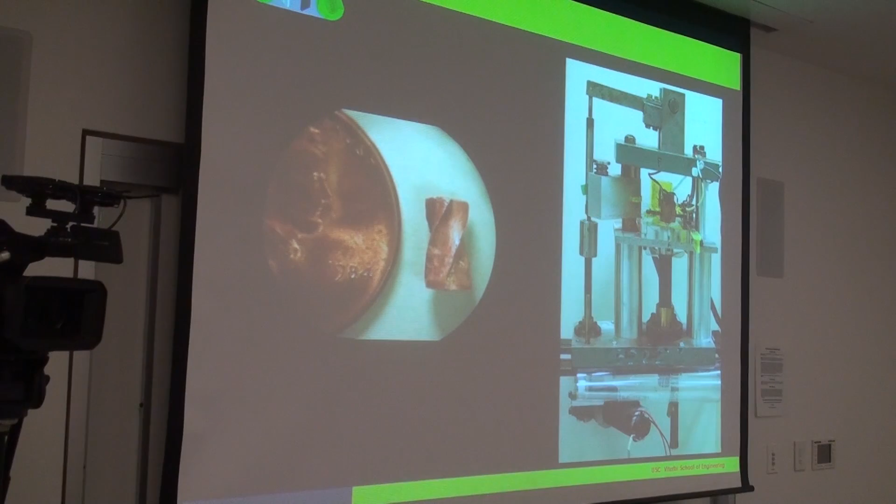So I thought a lot, and I concluded that there's really no way other than increasing the layer thickness in order to increase the speed. But if you increase the layer thickness, you lose surface definition, and you get, for example, for slant surfaces, this staircasing effect, right?

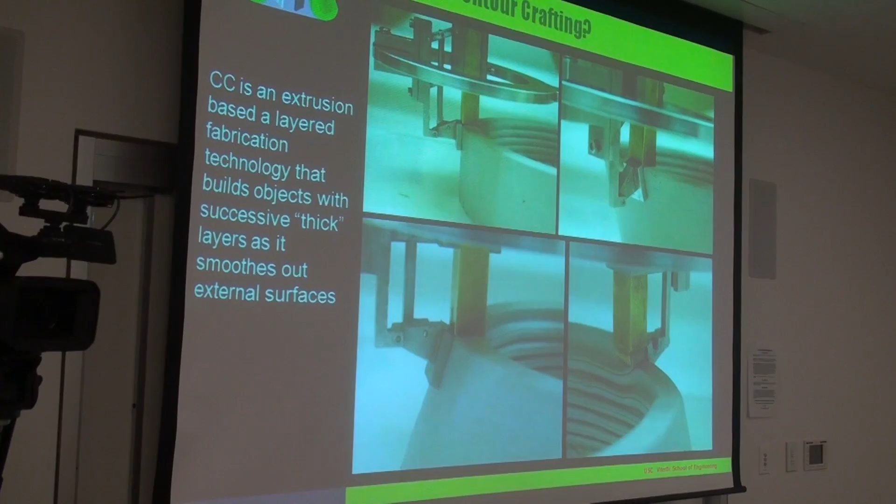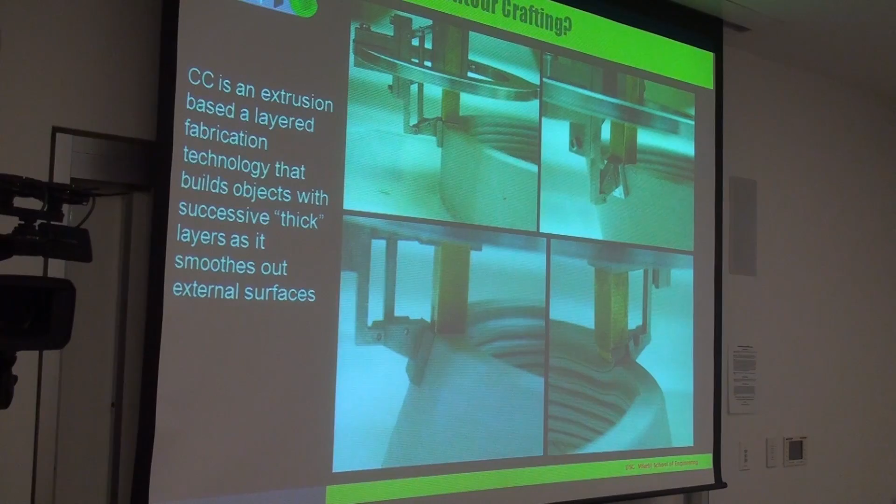So the concept came to me when I was filling a crack after the earthquake, the Northridge earthquake in Los Angeles. We got big cracks in the living room and other places. So I went out and bought some plaster and a putty knife, and as I was filling that, I was in Santa Barbara at that time. Yes, so as I was filling these cracks, it occurred to me that the simple tool has great capability in producing wonderful surfaces.

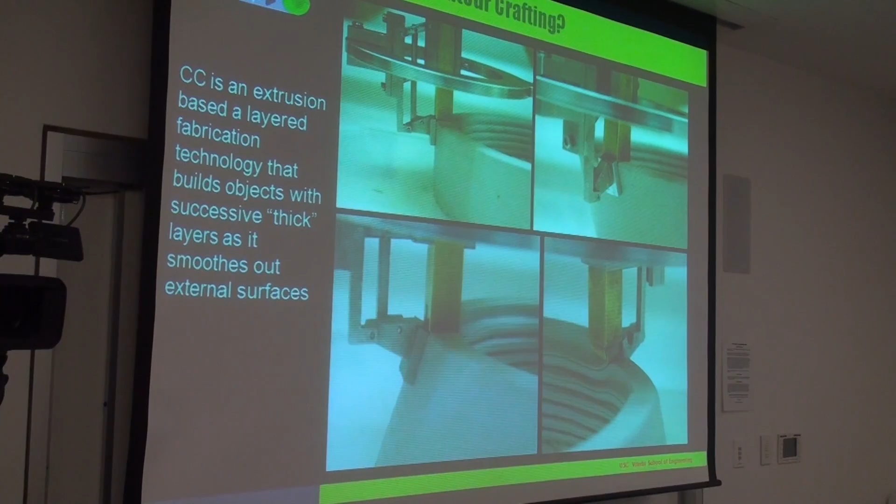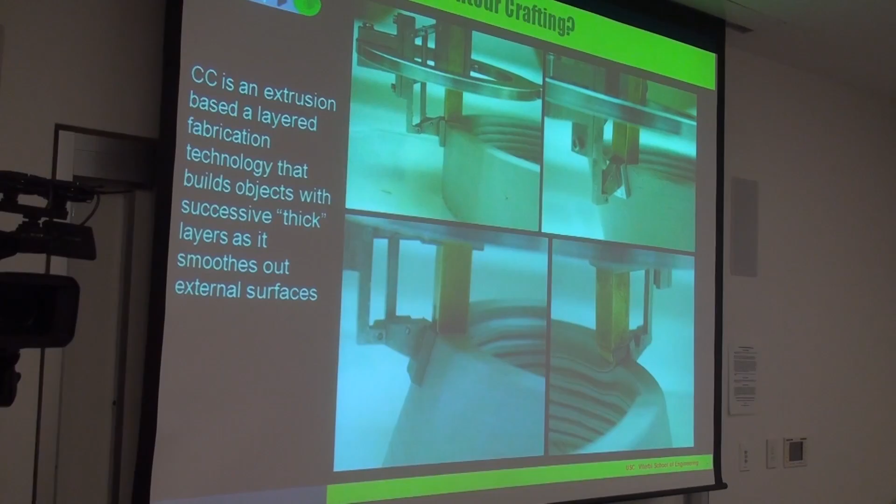So then it occurred to me that if I automatically feed this trowel with material, paste material, and move it in 3D space using a robot, then I should be able to use very thick layers and create very smooth surfaces. Well, that's what the artisans do, don't they, actually? Right, basically, exactly, right.

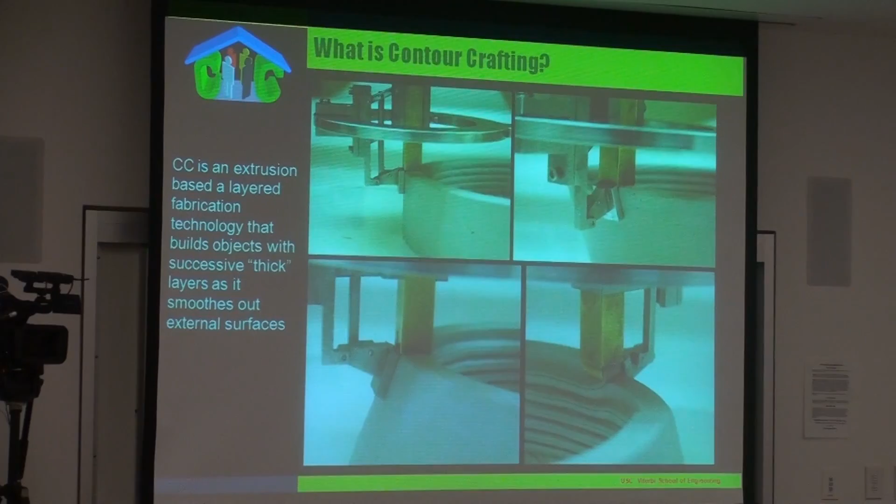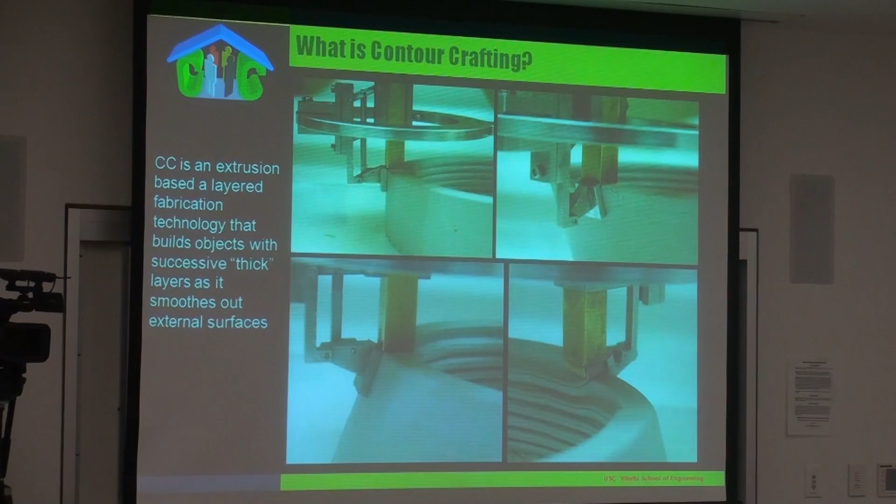So these are some of the early trials, as you see. That layer there is 6 millimeters. Compare that to typical 3D printing that has got a layer thickness of under 1 millimeter, usually 0.25 to 0.1 millimeter. And the surface quality here is better than even those that have got sub-millimeter layer height.

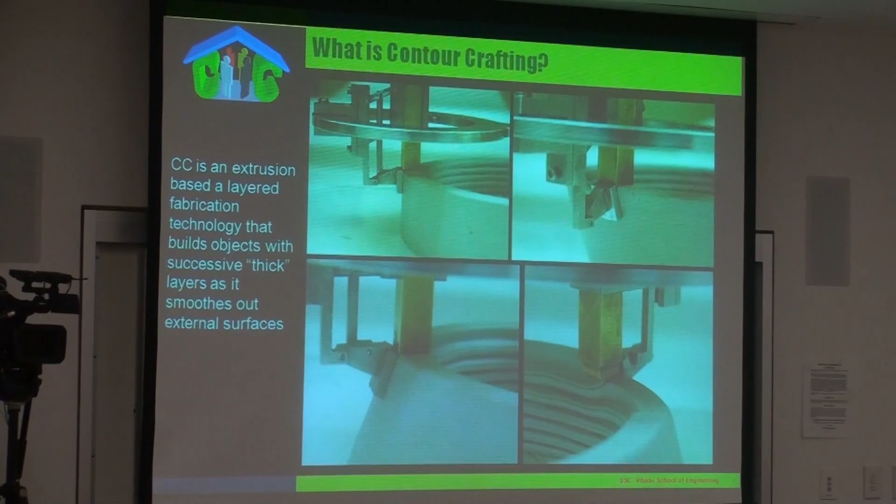What is the nozzle diameter? In this case, the size of every one of those, the size of this has got a square orifice, it's about 8 millimeters. Right.

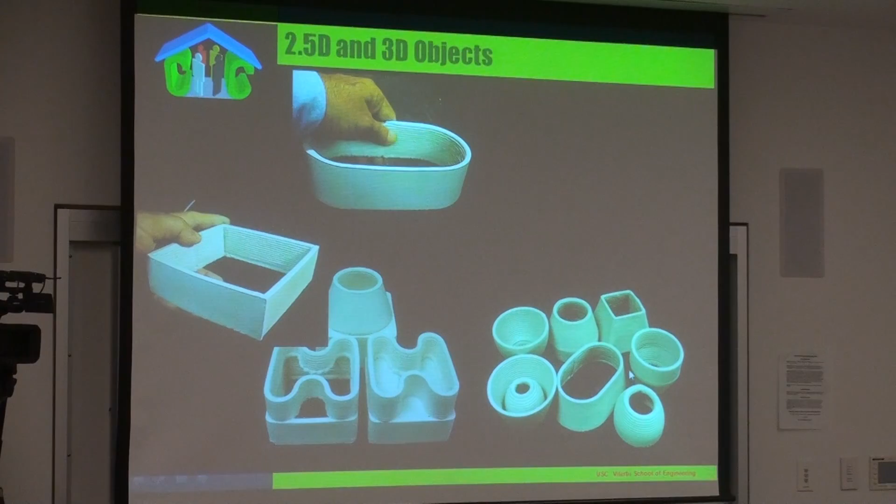So these are some of the ceramic objects that I produced. Then even sharp corners are possible, as you see, with certain algorithms that we use. The overhangs are possible, and so on. So imagine that this could now be thought about as a roof of a house, for instance, or that.

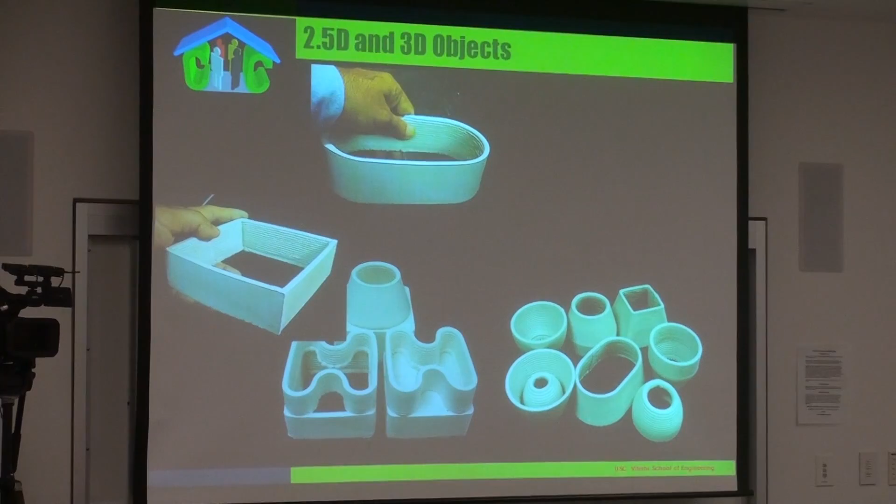So when I looked at these objects, it occurred to me that the potential for this technology really does exist for building very large objects, because the speed was acceptable now.

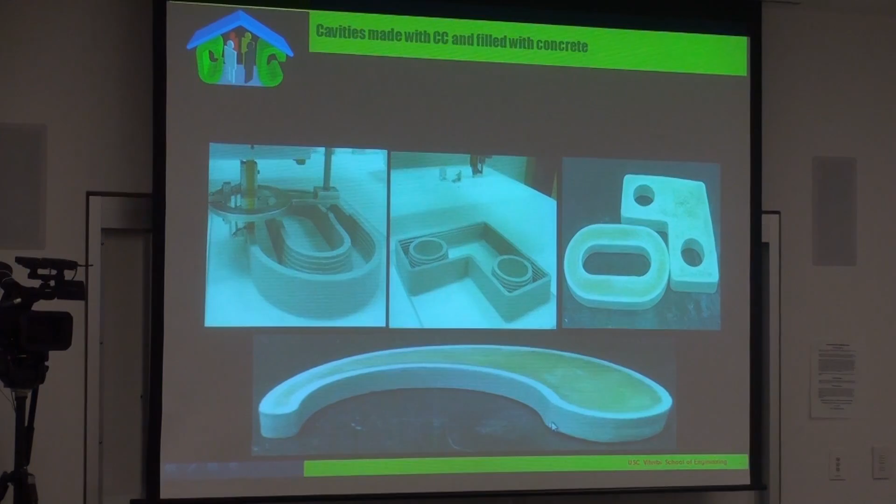So then I moved into creating hybrid objects. For example, this is plaster here, and inside of it is cementitious material, harder material, structural material, and this is soft plaster material. So you get a beautiful outside, but the structural inside.

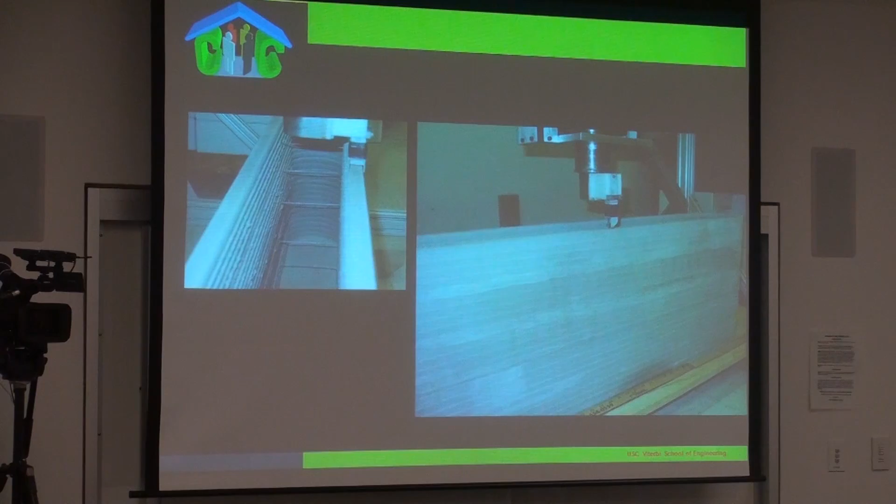So then I embarked upon building concrete structures. And well, when I went to our civil engineering professors, they really discouraged me by saying, hey, you don't know concrete. You cannot make concrete stand on its own like that. Concrete is made to flow and have a lot of slump because it has to be molded.

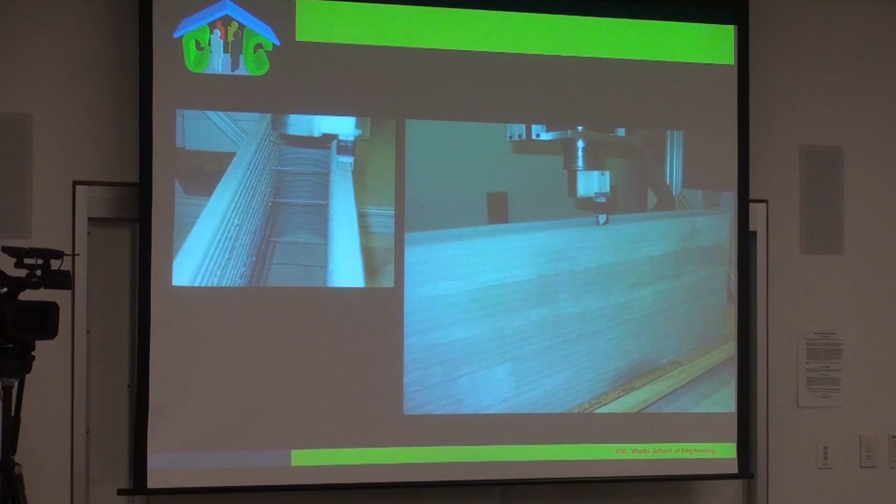So the mindset was the status quo, right? I had the advantage of being naive, you know. I just didn't believe them, right? Because I was not used to that status quo. So I said, well, we'll try concrete. If it doesn't work, you know, the idea is good enough for somebody to develop the right material for it. But we kept at it, and eventually we managed to extrude concrete, the kind that can stand on its own, hold its shape.

So the challenges were several. One is, of course, the low slump and keeping the shape, but the other one is just extrusion of highly abrasive fluid. You know, just try to put this much concrete inside a tube that is this long, 1 inch, 1.5 inch, whatever in diameter, and try to push it in with your thumb. You'll notice that it gets stuck, it won't go forward.

Because these granular particles create a bridge. They press against the walls of the conduit. The more you press, the harder it gets for them to move forward.

This was the big challenge. When that occurs, all the juices go through under the pressure of the pump, but all the sand and gravel stays behind, creating a rock-hard clog that you have to use a hammer and chisel to get out. We struggled with that kind of problem for about a year and a half. What you see here is the result after we overcame those problems—it's a two-stage process that fills the mold. Then we advanced to housing applications.

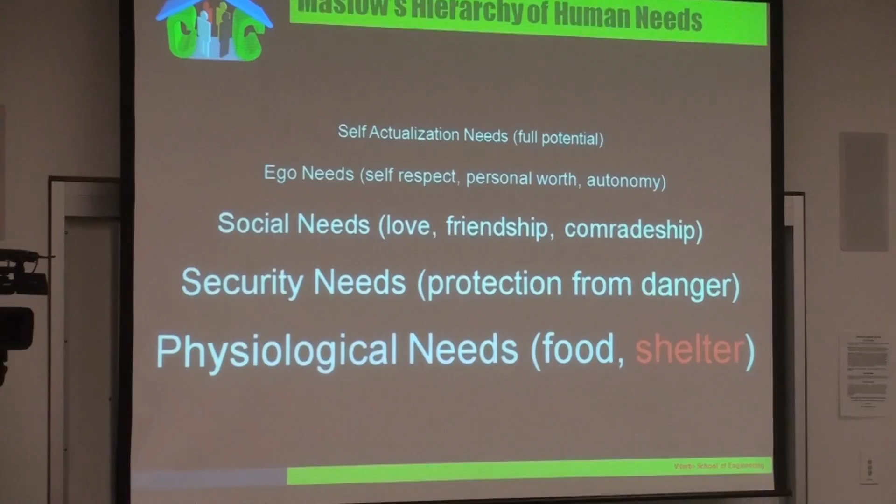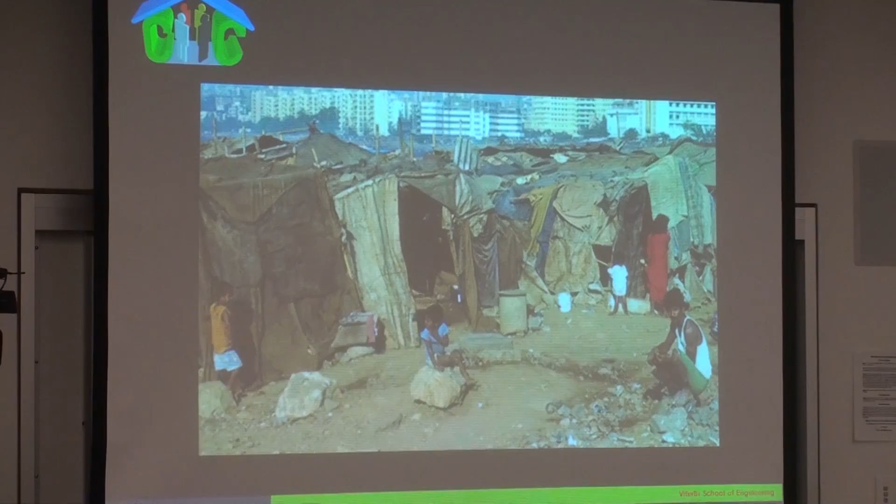You've heard about Maslow's pyramid of human needs, at the base of which are the two essentials: food and shelter. Unfortunately, at the dawn of the 21st century, this is the condition of shelter for more than a billion people—some statistics say 2 billion people live in such slums. I've visited several places in the world, like shanty towns in southern South Africa and other places in Mexico, and some conditions are even worse than that, believe it or not.

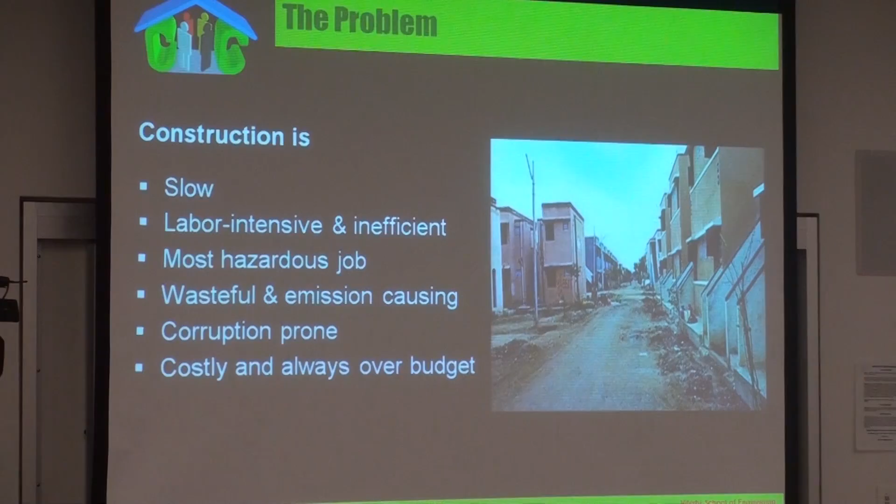And that's one reason automation is cheaper—it doesn't have those problems. Construction is wasteful and emission-causing; wherever there's construction, there's typically a huge dumpster where all the trimmings and wrongly cut materials get dumped. It's also interesting that 40% of all materials worldwide are used in construction, so waste at that rate has a huge impact on the environment. It's also corruption-prone, with many different trades involved, making management difficult, costly, and always over budget.

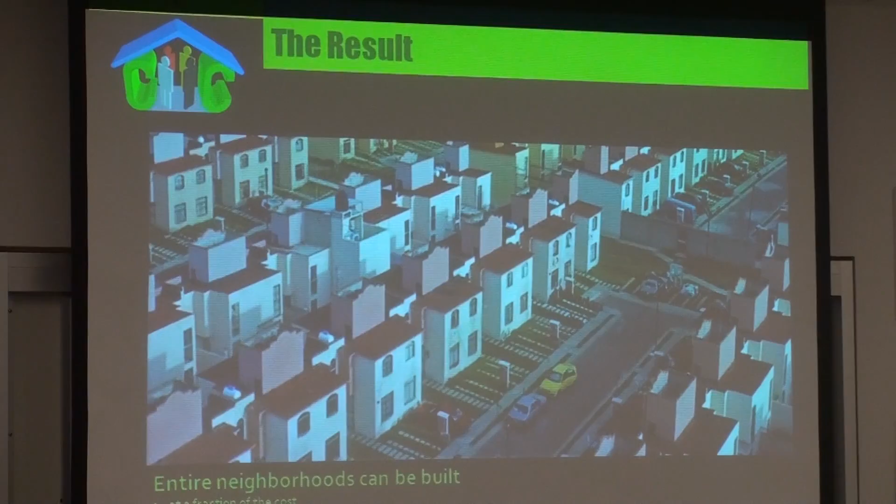So the solution we propose is something that will create dignified, nice neighborhoods instead of those slums, at affordable cost, a fraction of the time, far more safely, and with ultimate architectural appeal—so they won't look cookie-cutter like this, which I just grabbed from the internet. Because the process is computer-driven, there's no learning curve involved, so you don't have to repeat the same designs—every design can be different from the other.

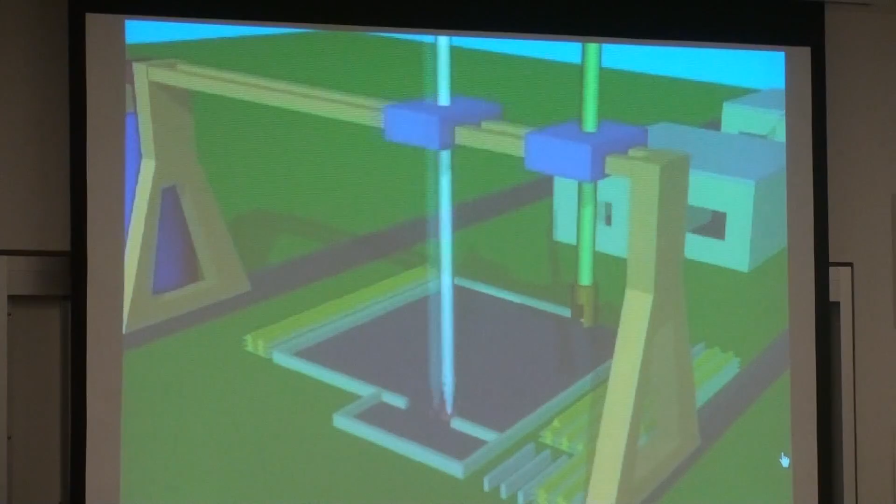This animation, a little jumpy now, shows the basic concept. You set rails in the street, for example, wherever there's a development, and have this machine build one house after another. You bring the architectural design on a flash drive, put it in the machine's controller, bring the material, press a button, and the building will be printed for you.

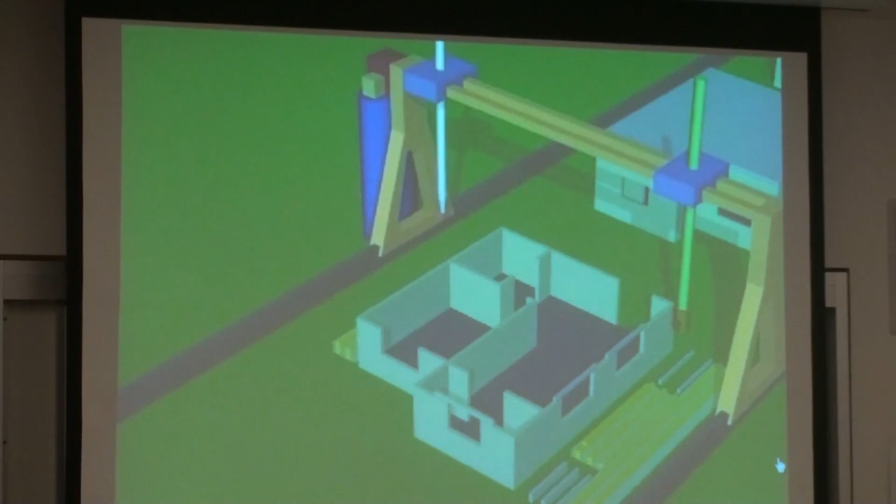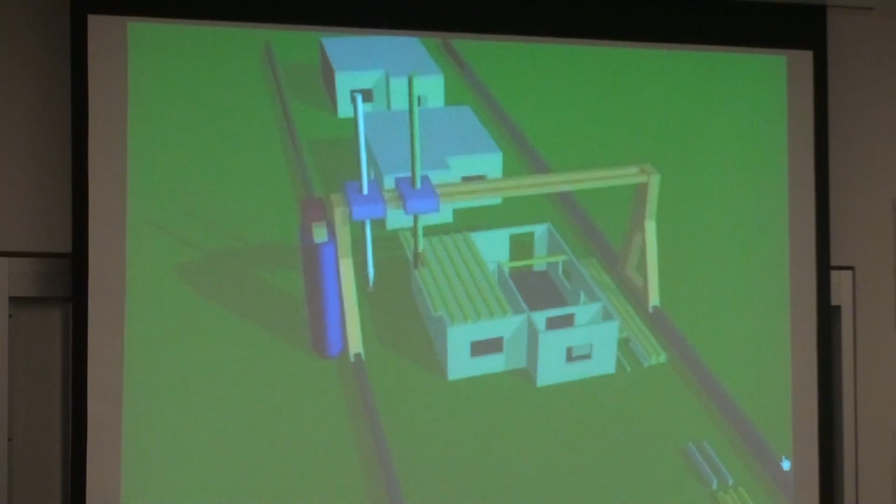Much like any other 3D printing, it doesn't need much attendance. The machine is pretty light—a few people can carry it to the site. It collapses onto a flatbed truck, you take it to the site, and in about 30 minutes you erect it. Everything is laser-guided and self-correcting—the rails don't even have to be well aligned when you put them down. Many operations can be automated, even building the foundation.

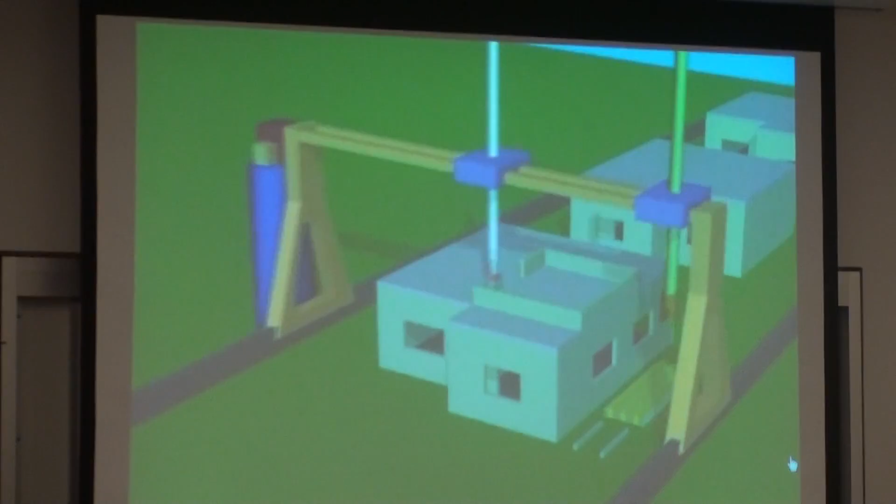So the site itself is the manufacturing line, so to speak. Exactly—you set the rails down, and can the rails disappear afterwards? Yes, you lift them afterwards.

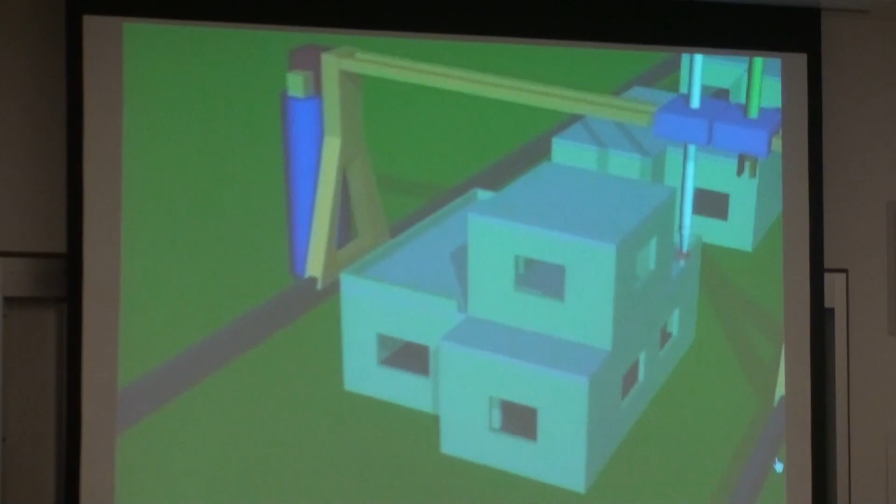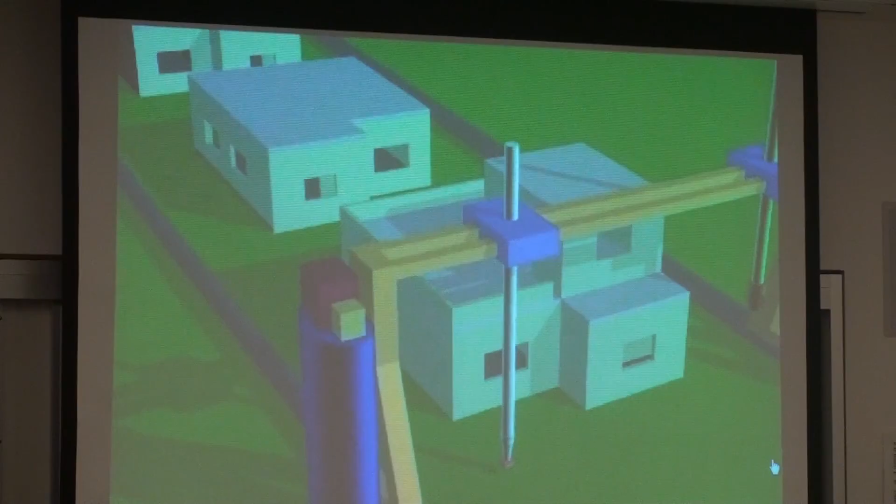What's the consistency of the concrete? It's 10,000 PSI. What's it made of? Concrete—sand, cement, water, the same basic things, but with a very low slump. You can use normal Home Depot concrete; the first wall segment I showed you was made with Home Depot concrete, but we added the right admixtures to make it low slump, to get the rheology right so it can be pumped and flow through without segregation.

The common approach is self-compacting concrete, which is very liquid, but we don't want that because it's high slump. Instead, we have a process where we build the edges and rims with zero slump and the middle with high slump. We bring the same concrete to the nozzle, and at the nozzle we separate it into two channels. To one we add a chemical that increases slump; the other gets a chemical that reduces slump and accelerates curing.

So what's the thickness of the wall? Well, it's variable. Let me show you. A model like this, a house like this, is very easy to build with this technology.

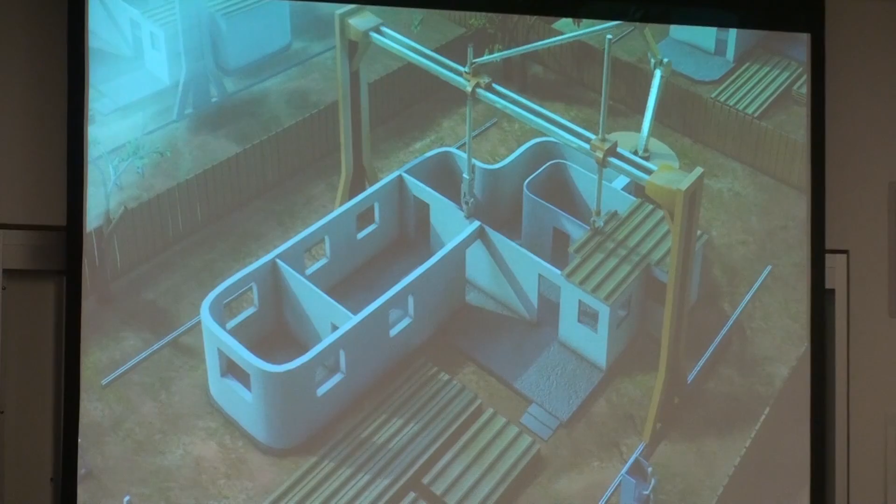And of course, whenever you curve the buildings, you gain strength. Even with the same poor material, like adobe, you can make stronger buildings. I'll show you an example later on.

How do you get over the strength of the concrete for earthquakes? It doesn't seem like it will be very reinforced without rebar or something. Is that right? No, we can put rebar in there. Full length bars? Yeah, you will see in the next animation.

Building with curves is difficult to do, especially if it's doubly curved and so on. It's very expensive, but for technologies that are computer-driven, it really makes no difference. So this is the answer to your questions. This is automated reinforcement, and we have many different approaches.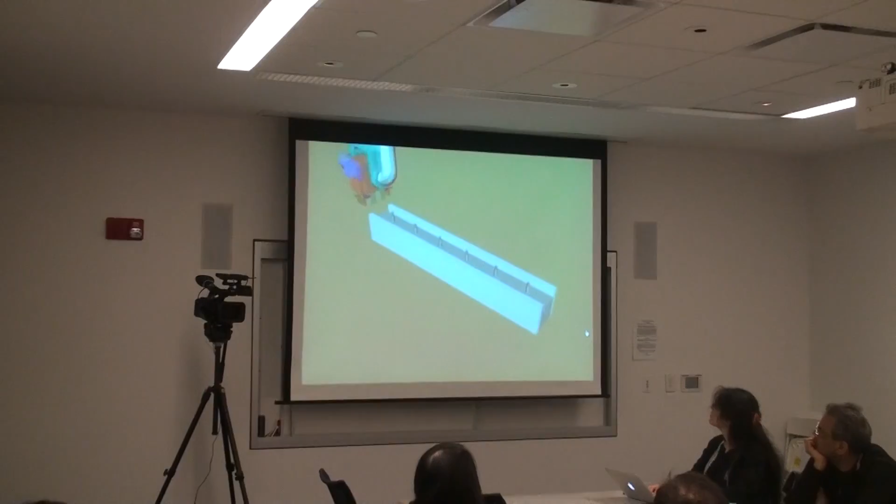This one uses segments of rebar that are assembled onto one another. This is building a two-dimensional mesh of steel automatically. The device you see there is an accessory mounted on the same gantry robot, so it's a very streamlined automation.

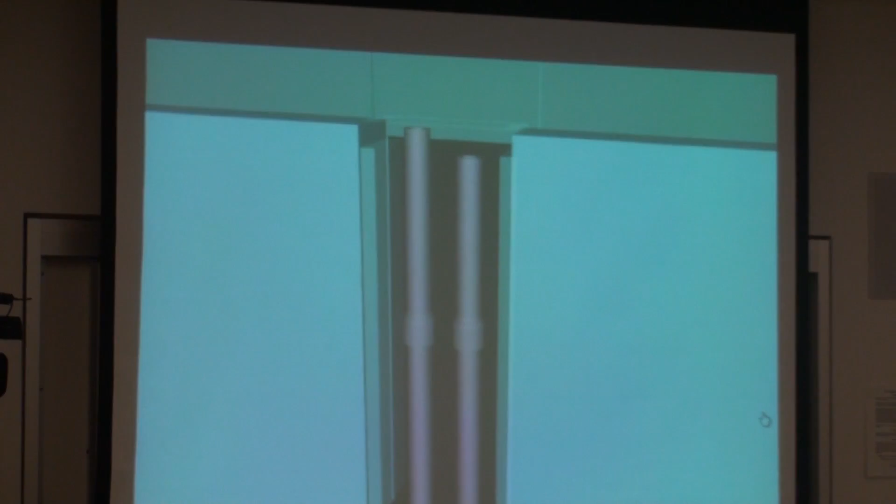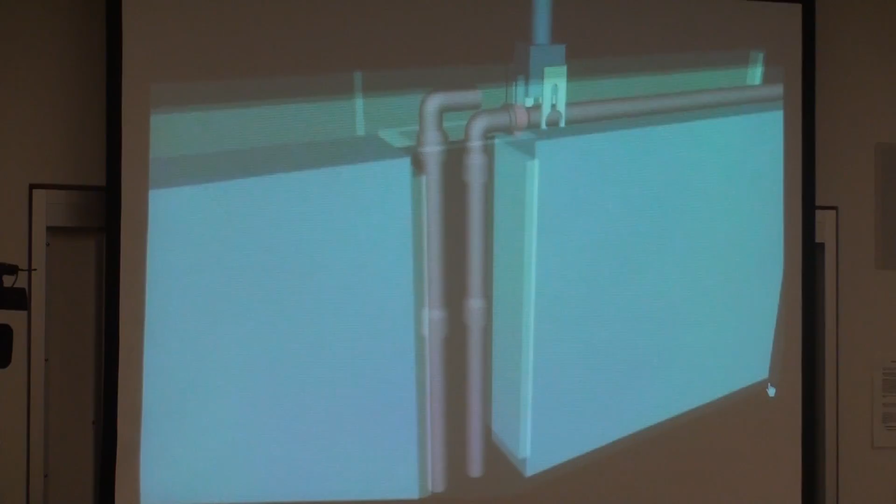For every so many layers, you have segments of, for example, copper pipes that have solder in the inner rim, and electrically they're heated and fused. So you build the whole plumbing network in the building as you build. You can also do the same for electrical network installation.

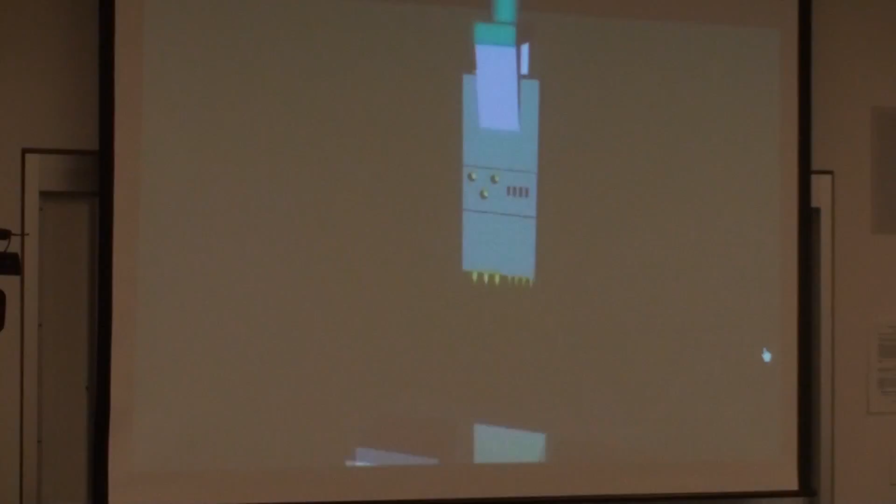These polymeric blocks can have power lines and communication lines in them. All you have to do is, again, for every so many layers, plug them in. It's just like Lego blocks. We have different designs for T-junctions, corners, and all that.

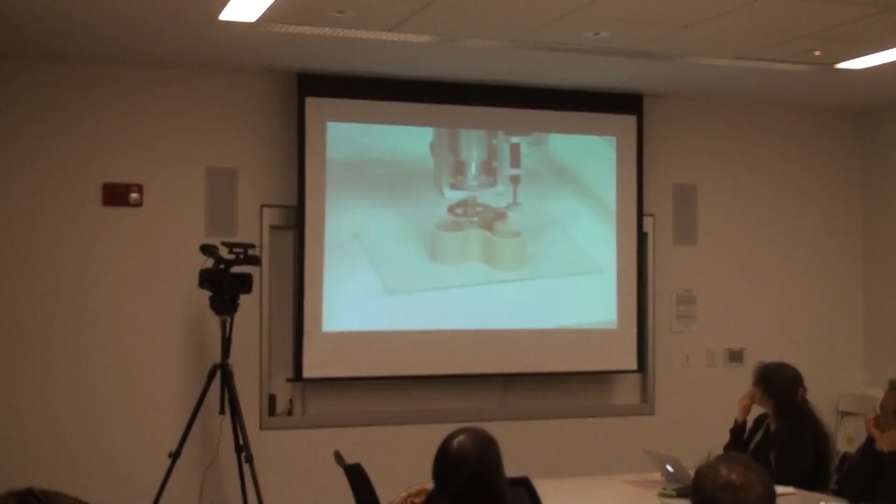This shows the video of the operation at a smaller scale. Some of those ceramic parts you saw, this is the machine that builds it. This is a 2.5D structure. Imagine if you were to build this with a conventional method, you'd have to have a formwork with lumber shaped like that, which is very difficult, if not impossible.

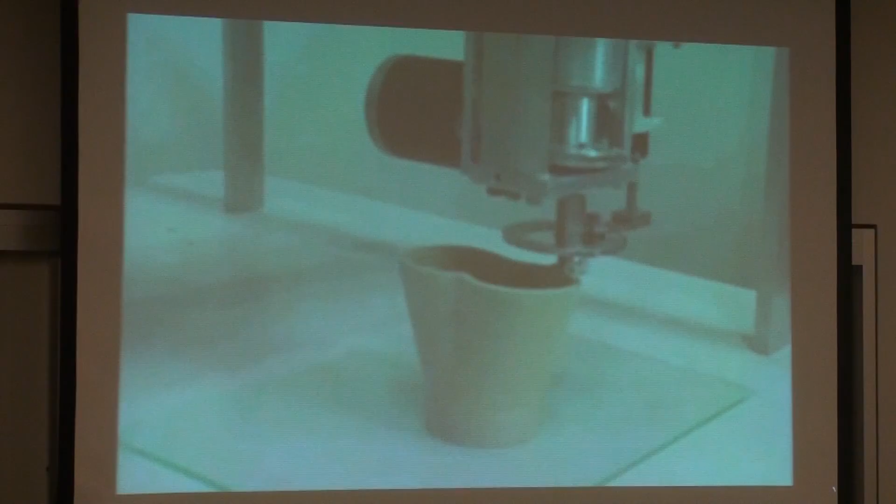That one is true 3D. The trowel is constantly changing its angle as it's moving around. What did you mean by 2.5D? 2.5D means the cross sections are the same as you go along the z-axis. True 3D cross sections keep changing.

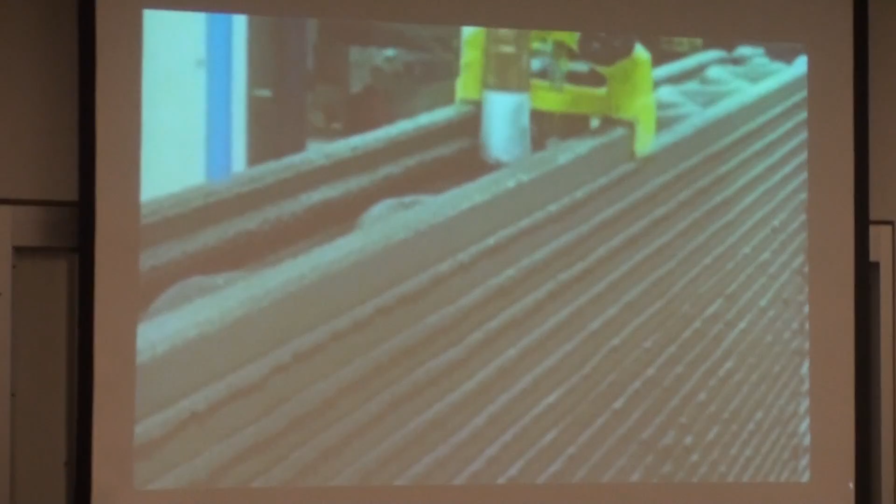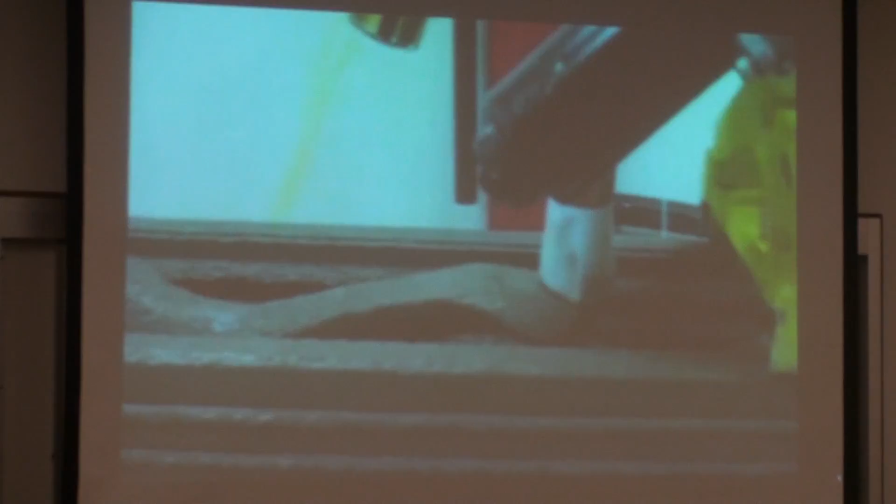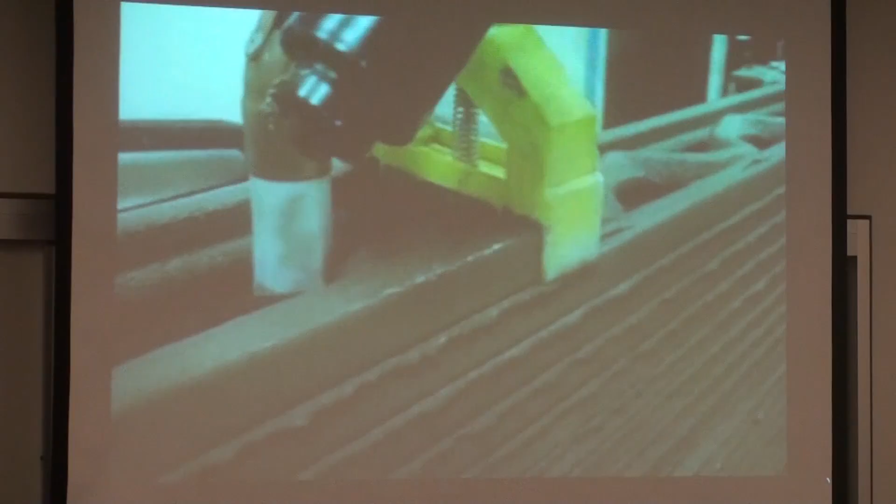What is the printing speed? That's the printing speed that you see there. You can get about 1 inch high every layer, and we can go at the speed of 1 foot per second, so 1 square foot of wall can be built in 12 seconds. So you can now imagine how fast the whole building can be built—a 2,500 square foot building can be built in less than 20 hours.

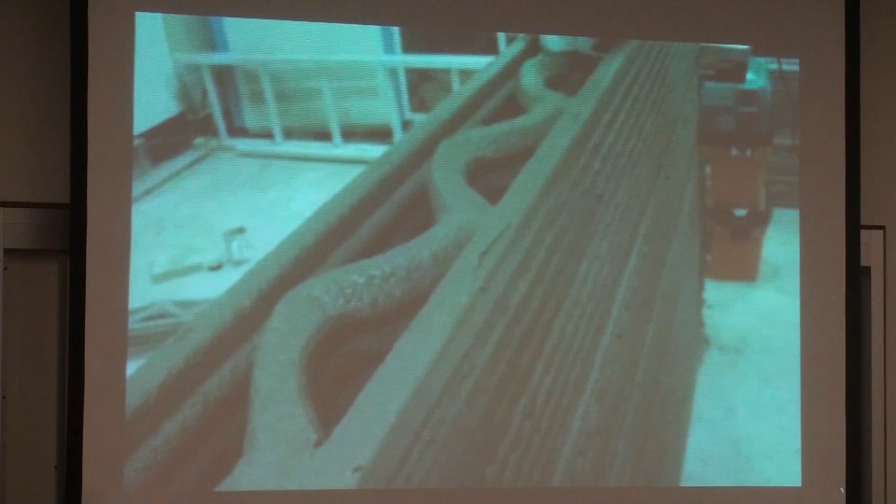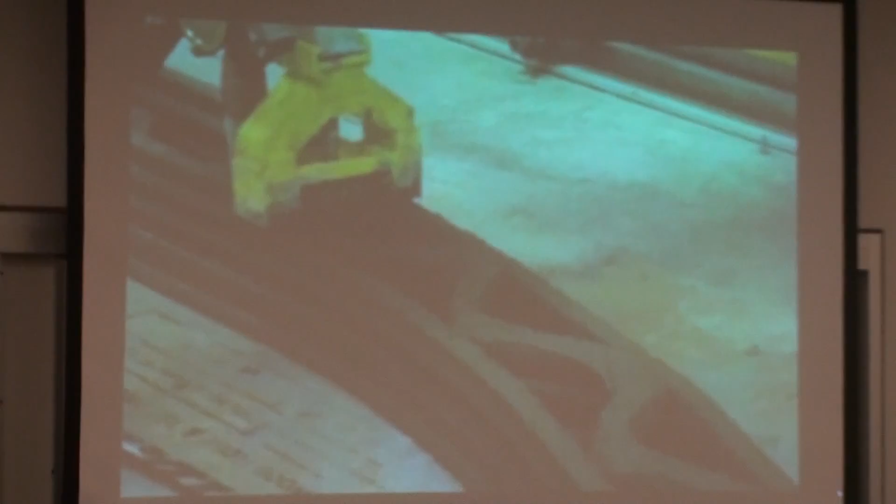On-site, custom design, and we have many different ways. This thing will only work with materials which will flow like this, like concrete and so on, at the moment. Right, but we have tried many different materials like gypsum, plasters, and stucco material.

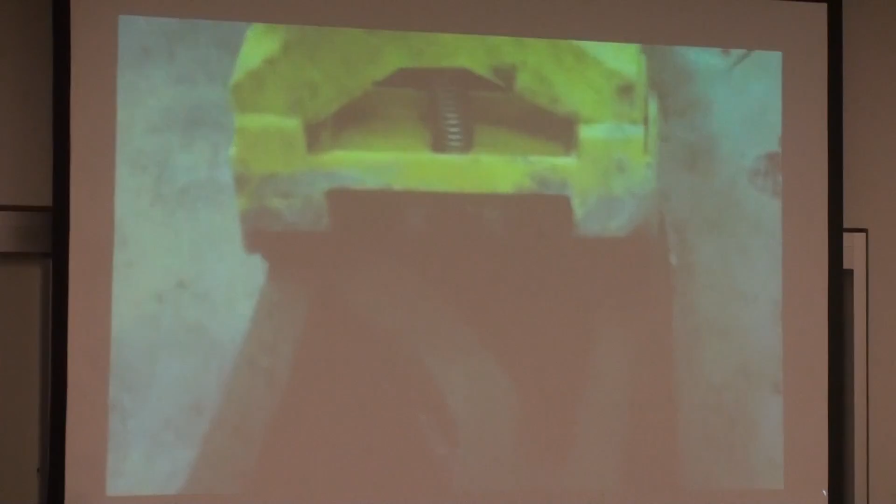We have actually tried composite materials made with wood—like if you take sawdust and wood chips and mix it with epoxy and extrude it, it will work. Anything you can turn into a paste, which you can extrude or mold, will work.

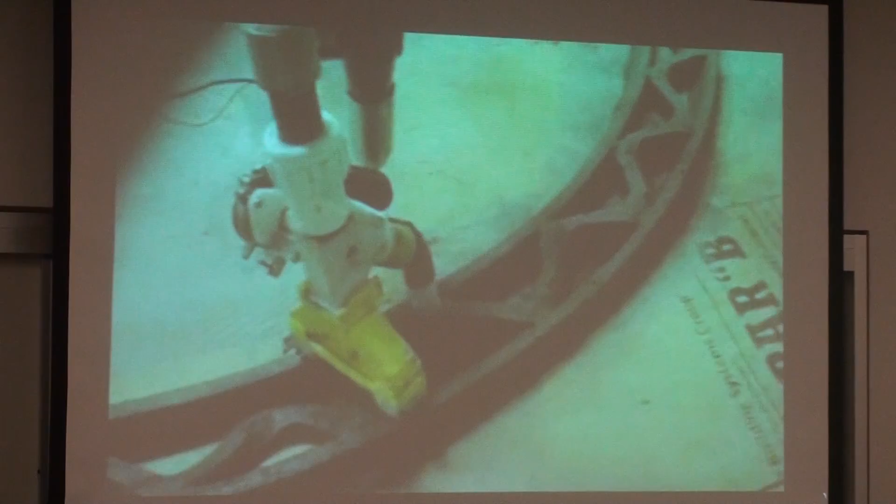Look at this S-curve. If you were to build this by hand, it's really difficult. How would you do it? How do you form the lumber like that?

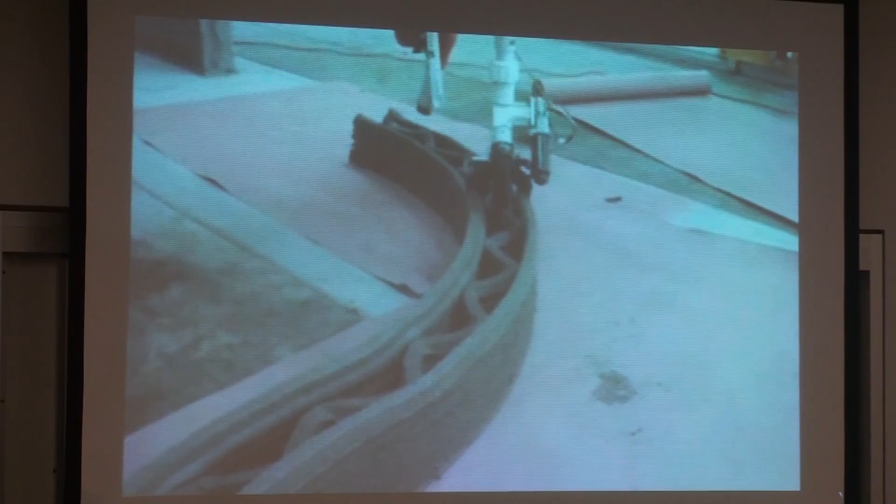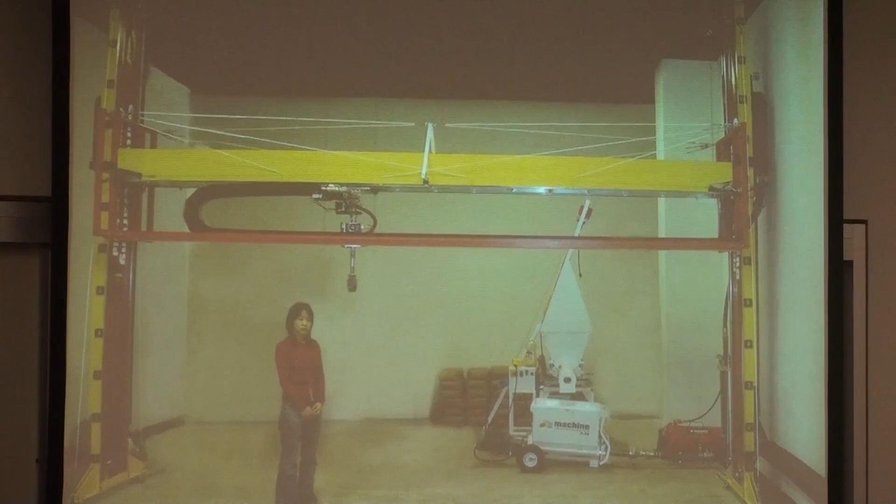Well, you've seen this. This is one of the machines that we built. This machine is about 500 pounds, very light in weight. It makes almost no noise, and it's very agile, relatively accurate. It gives you millimeter accuracy. Typically in current construction, it can be off by a few inches and nobody notices. This thing is really accurate. And of course it uses wet concrete, no dust. You can get up in the morning and see a new house built next to your house without having noticed it, because it makes no noise and doesn't make any dust.

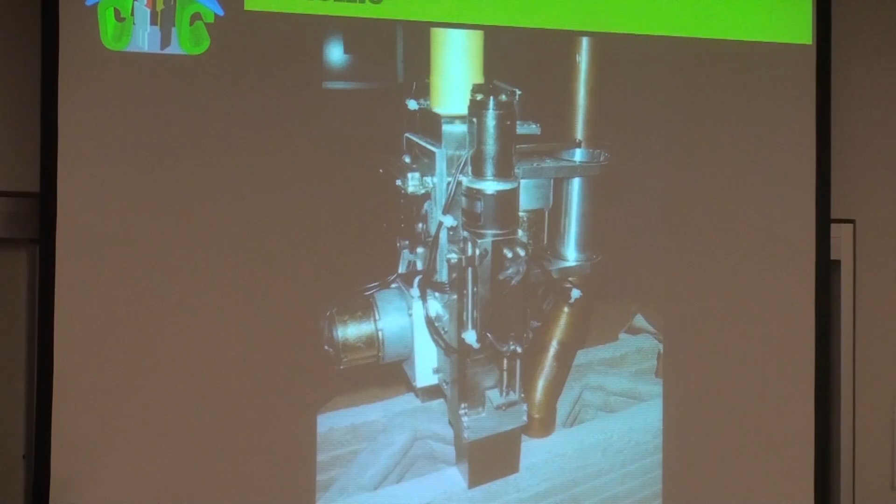This is one of the more sophisticated nozzles that builds the outside and inside concurrently, so that is super fast.

Some of the challenges here have been regulating the flow of concrete. Concrete, aside from being a non-Newtonian material with all kinds of aggregates and abrasive stuff in it, also has air bubbles in it. Therefore it's like a sponge. What you press on one end does not necessarily come out on the other end. It's like pressing a spring into the hose. So you keep pumping and pumping, and all of a sudden a lot of material jumps out from the other side, then it gets stuck, and then it jumps out again.

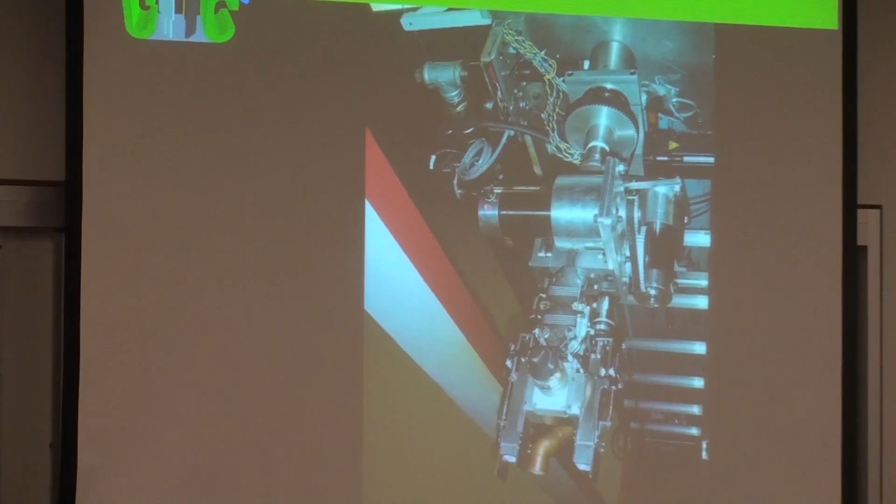So how do you regulate the flow so that, as you saw, it comes out very smoothly? The flow rate is relatively accurate, and that's why we can consistently build those structures. So how do you do that? That has been some of the main challenges that have taken a lot of my time.

Anything that deals with concrete has to involve metal and rubber. You cannot have metal and metal. Rubber, of course, wears out. If it wears out, you lose the juices. If you lose the juices... Can you use materials unlike concrete, which obviously is a big building material? In fancy homes you even have Teflon and those kind of things, and presumably the plastics industry has learned the molding and extrusion properties.

Is it possible to use those? For certain features, we are actually considering that. That gets back to conventional 3D printing that uses plastics. So for kitchen appliances and kitchen counters, we have looked at using polyester materials in combination with concrete. Yeah, all of those are possible.

So the vision that I have is total automation of building construction. Look at these cars that are being made almost automatically today. They're much more complex than buildings, made with more difficult materials. The accuracy and precision are much higher, and the geometries are far more complex, yet they've managed to do those automatically.

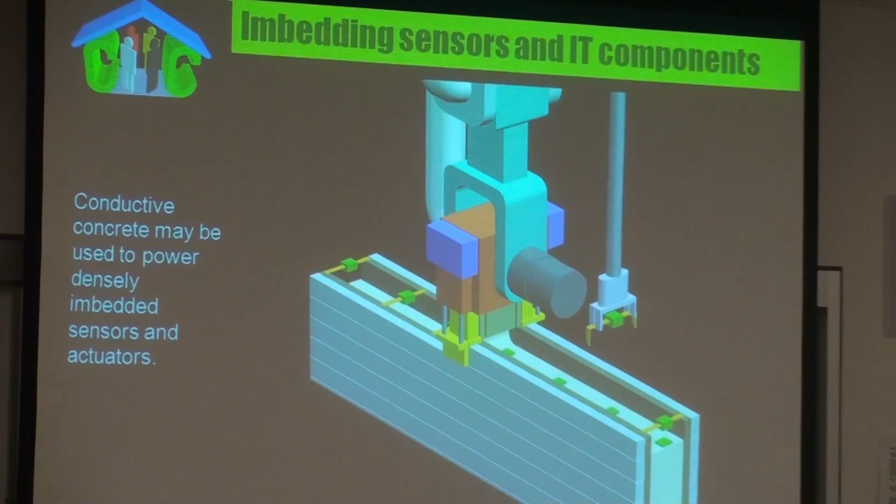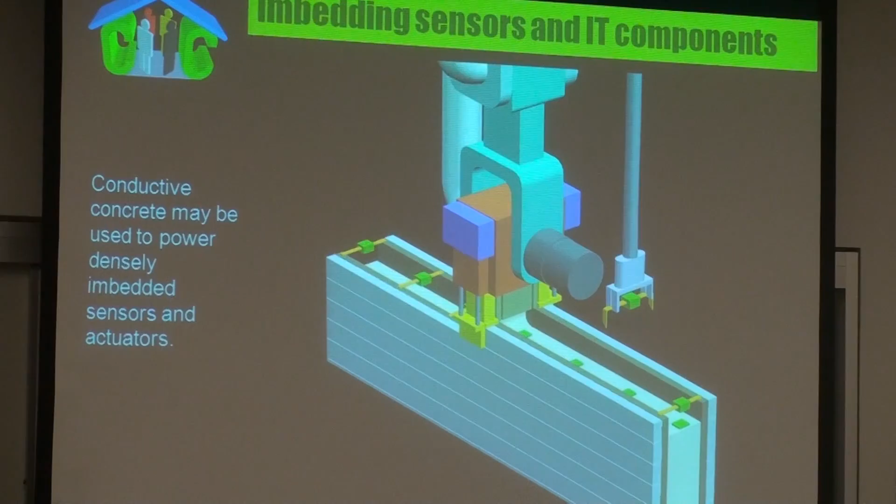There's a lot of things you can do when you build things layer by layer automatically. You can insert sensors. The brown material you see there is conductive concrete. If you add carbon fiber or even graphite to concrete, you can make it conductive. So you can insert these wireless sensors that are powered by the wall, and they can report on structural health monitoring, like parts of bridges, buildings, intruders, temperature, whatever.

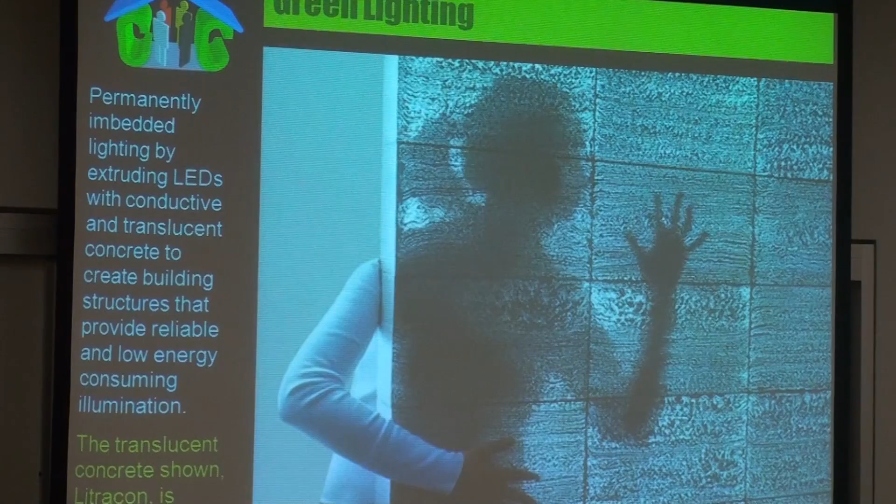These days there is translucent concrete. Concrete is basically rocks and cement. Cement is anything that can glue the rocks together, right? So if instead of rocks you use pieces of glass, and you use some translucent glue, and there are a lot of glues that are translucent, then you make some form of translucent concrete. A Hungarian company has done the same, with reasonable strength—structurally approved strength. You've noticed some bathrooms use glass tiles; it's equivalent of that kind of thing.

But this area is improving fairly rapidly. Now they're using segments of optical fibers into the material, for better conduction of light, saving energy in parts of the building.

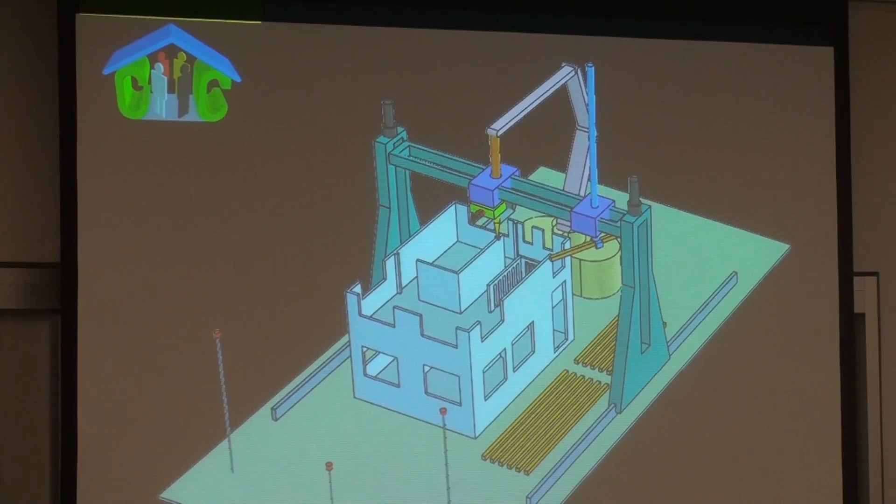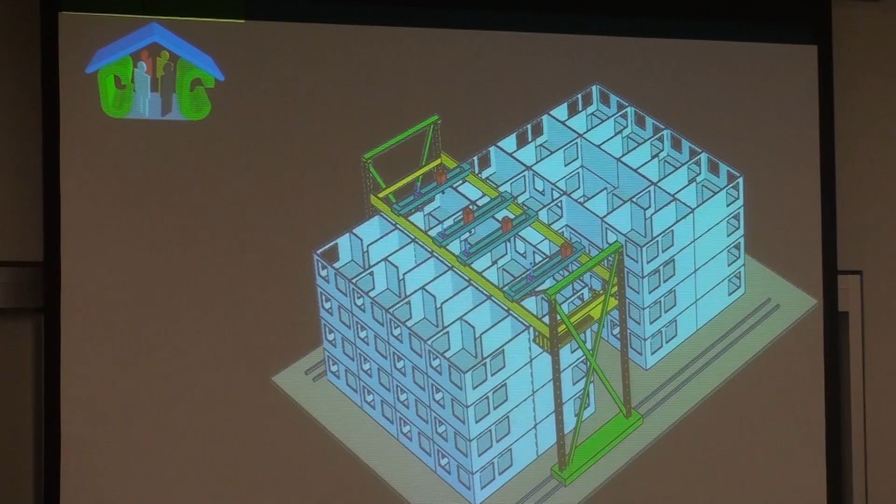Robotically, we have different kinds of applications. This is a gantry system like the one that you saw. For larger buildings, for increased speed, you can have a multi-nozzle system like that, so this will be many times faster. Therefore, a huge building like an apartment complex, school, hospital, or government building can be built in reasonable time. You can build high-rises when the machine platform can actually climb the building as it builds it. The whole platform is light.

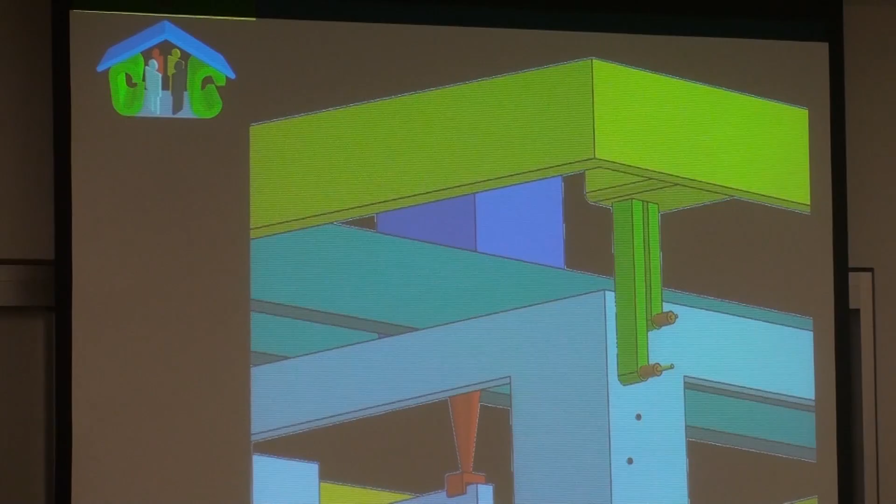For example, if you put segments of tubes every so many layers in the wall, you'll have pretty good bases to insert pins into and walk the machine up. After it is done, it can come down. In the usage life of the machine, another frame can be used to automatically clean and paint the building or clean the windows or whatever. Once you build the building with automation, you can conform it to other forms of automation.

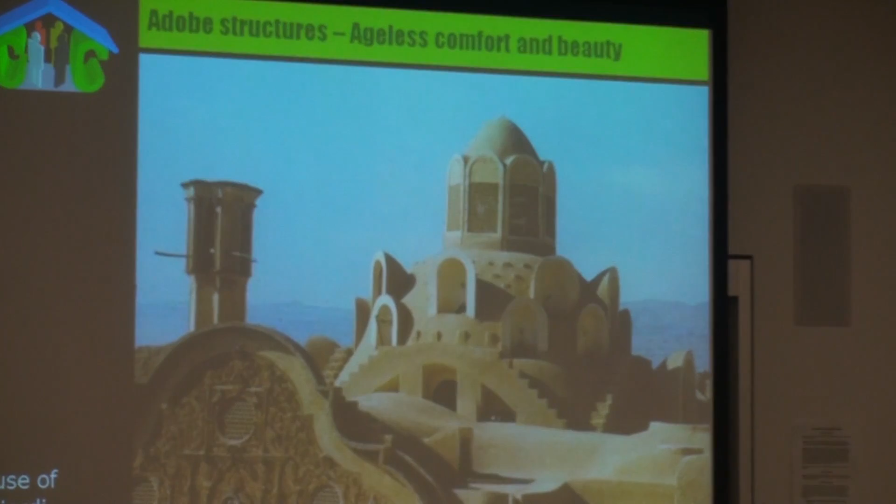Maintenance, again, is one of them. So this is the building that I referred to. Look at this gorgeous design, made with only adobe material, clay and straw. It's over 200 years old. It is the house of a carpet merchant in the city of Kashan in Iran. You can go to the internet and see other views of it. It's just amazing architecture. Iran gets a lot of earthquakes, and this thing has experienced a lot of those earthquakes, and yet it's standing up erect.

You can test this with a piece of paper. If somebody gives me one page of paper... The worst kinds of walls are the ones made in a rectilinear way, straight planar walls. You see, this paper cannot hold its own weight when you hold it straight. But if you curve it a tiny bit, it gains a lot of strength.

So with the same weak material, you can make a much stronger structure if you curve things a tiny bit. But when you build things manually, it is hard to curve them. How do you follow like a polynomial with simple construction workers? It's not really possible. But again, when you do it by computer, you can do wonderful stuff.

So that building is 200 years old, and it's reinforced concrete made of curves of clay? No, it's only clay, adobe material, the way they build it, but unreinforced? No, it's reinforced with straw, pieces of straw, about this big, this long. Wheat straw is amazing - it's got very strong fibers in it, and it lasts for centuries.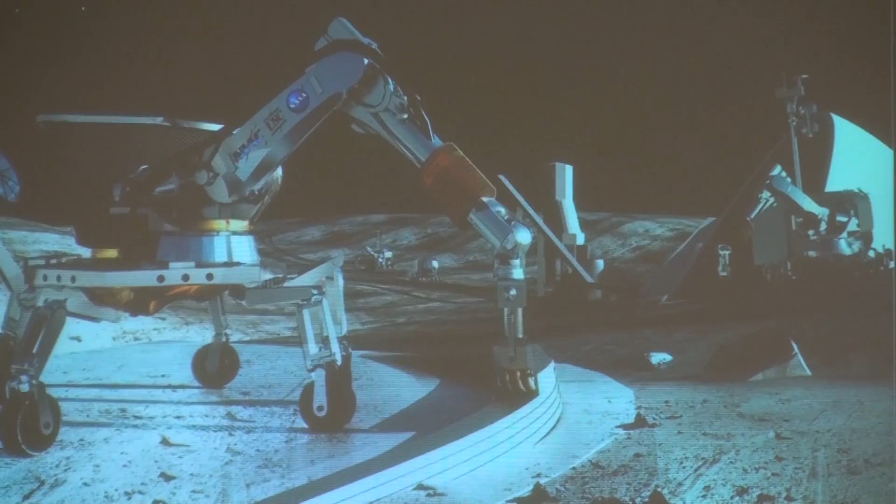You need to build roads to connect the landing pad to the settlement. We need hangars to store the landers and other equipment, to protect them from micrometeorites and all kinds of radiation, solar and cosmic. So the way we are doing this is by melting the regolith with a contour crafting attachment, which is put on top of a NASA rover. That rover is built at JPL—it's a 6-legged rover called Athlete.

So we're melting the regolith using microwave and extruding it, building layer by layer.

Another application, especially for the Martian situation where SpaceX is interested, and we're hopefully soon starting a new project with SpaceX, is sulfur-based concrete. I remember from childhood they were connecting ceramic insulators of electric lines to metal pieces that would screw onto the beam using molten sulfur. I noticed among the constituents on Mars, especially sulfur, we can get sulfur, which melts at a pretty low temperature, 130 C, mix it with the local Martian material, and send it through a heated nozzle. This won't work everywhere on the moon because it can get hotter than that under direct sunlight and the structures would melt. But on Mars, the highest temperature is typically about 0 centigrade, which is ideal for sulfur-based concrete structures.

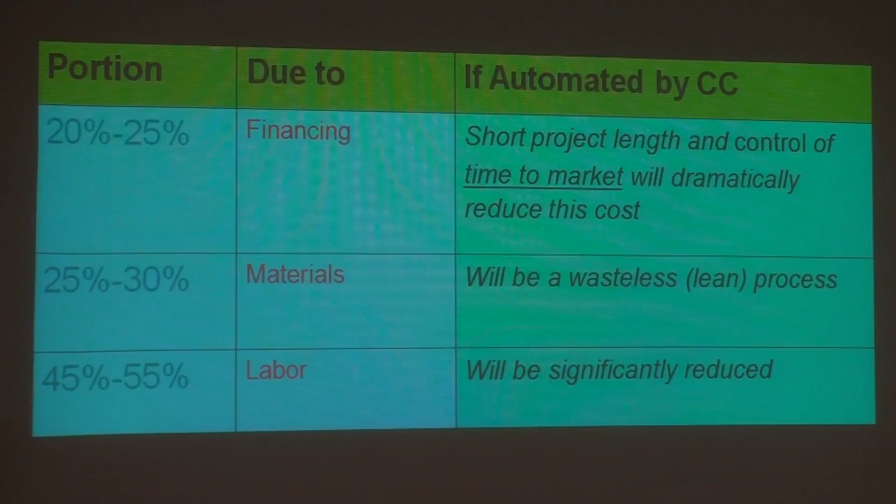Back to construction on Earth: about 20 to 25% of construction cost is due to financing, the time value of money tied up for the duration of construction. We build almost instantaneously, so you save all of that. Our material will be more expensive initially because there's R&D going into it, but gradually that cost will lower to the current conventional cost. With zero waste, I assume in the long run our material cost will be less, and we almost eliminate labor.

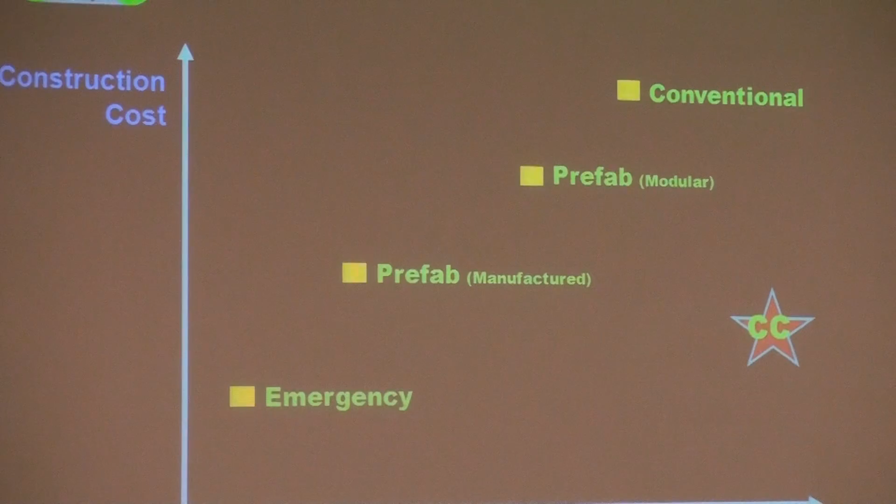As far as the competitive landscape with respect to construction cost, contour crafting is lower than even prefab manufactured homes, like mobile homes and prefab modular, and definitely far lower than conventional construction, maybe only higher than emergency construction like tents and conexes.

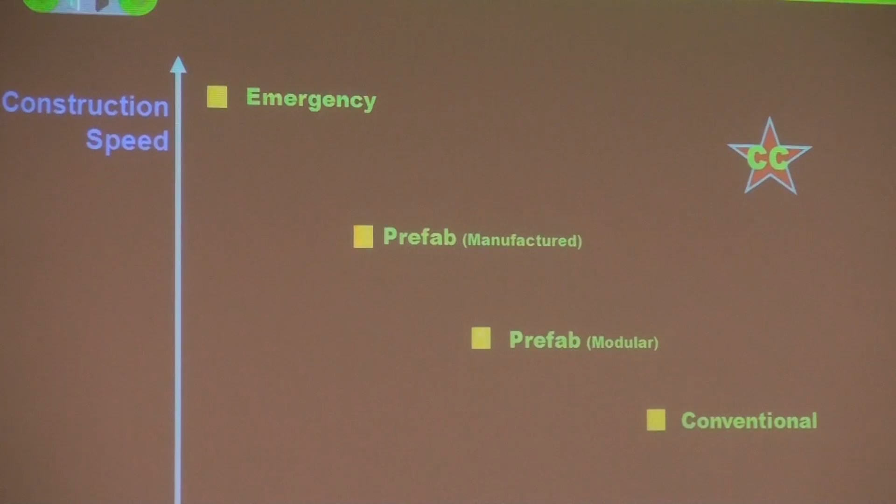With respect to architectural flexibility and speed, nothing really beats contour crafting. We even compared it to building the collective emergency shelters the Army builds, which takes 4 people half a day. We build totally autonomously in about an hour. A concrete shelter compared to a tent is faster to build and protects you against explosives, chemicals, radiation, and so on, much better than tents.

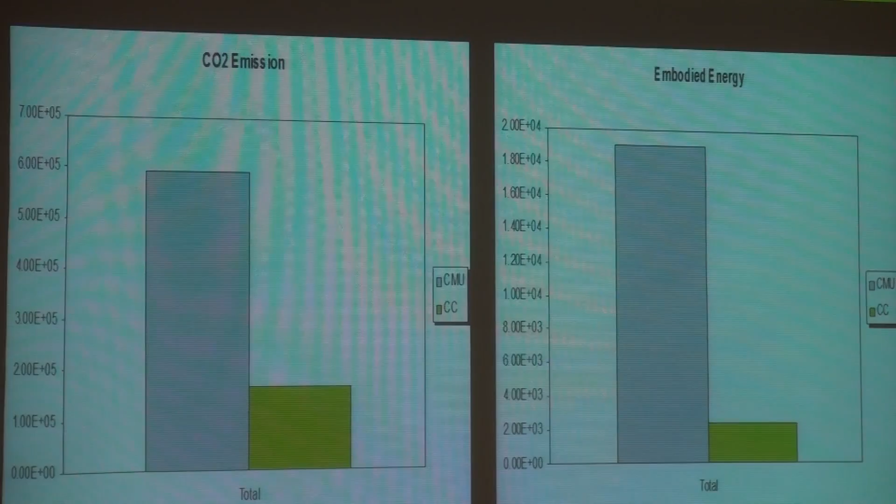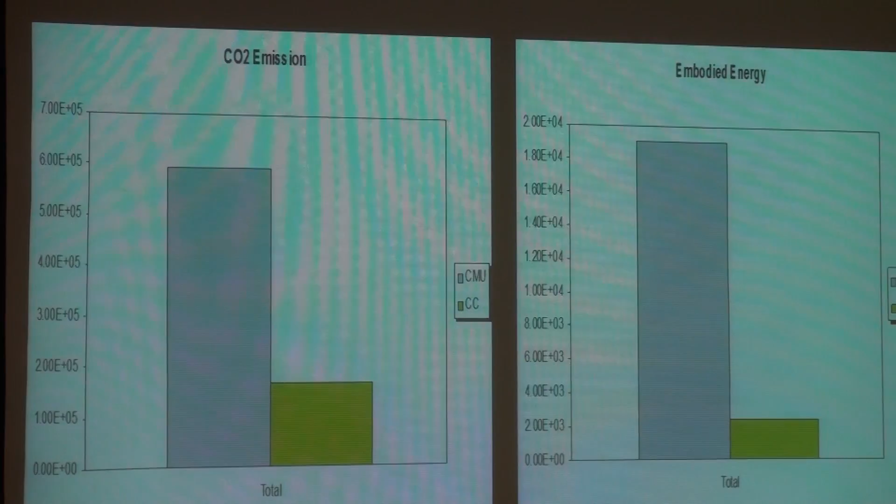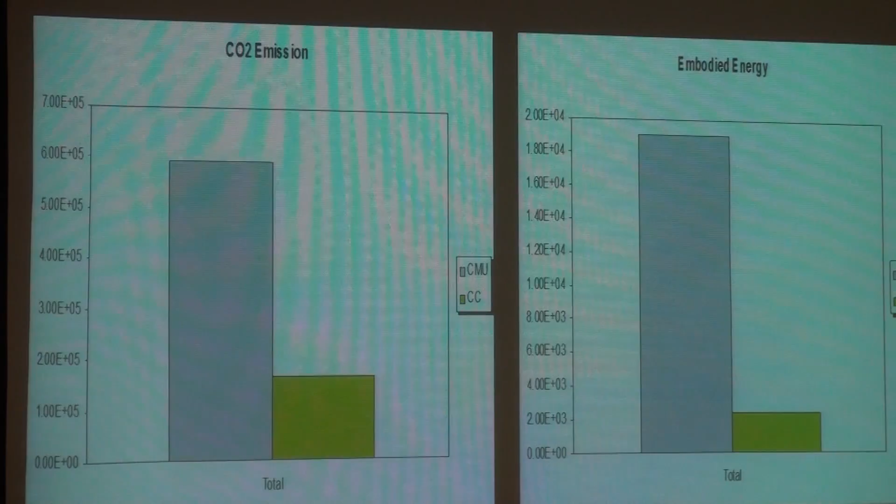With respect to environmental impact, the CO2 emission of conventional construction is shown against the green one, which is emission related to contour crafting. Most of the excess emission in conventional construction is due to people driving back and forth to the job site every day for the duration of construction. The embodied energy is also much less than the current one, with most of that energy spent on gas fuel.

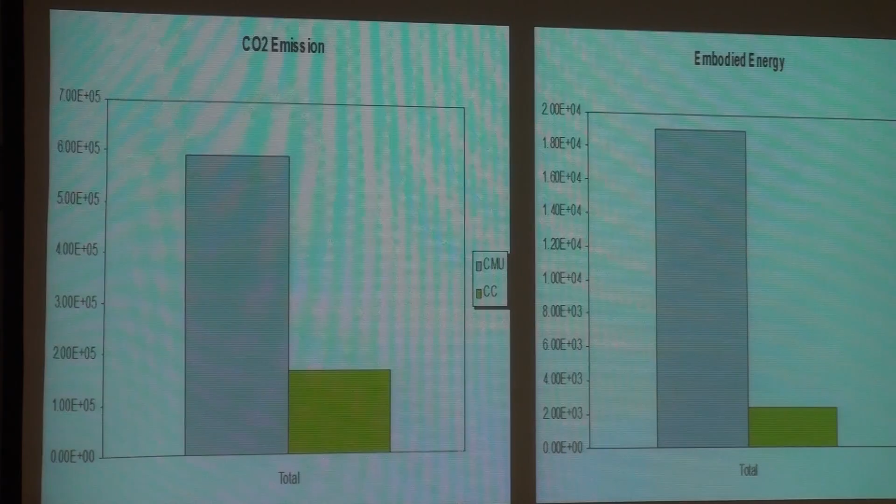People going back and forth — but the machine is fully electric. You can have a little generator if you want to build in the middle of nowhere, or even use solar panels to build in the middle of the desert. If we combine the NASA findings, we can actually build without water in the middle of the desert using sand.

The state of Hawaii has expressed interest because they're producing a lot of sulfur, and their whole island is made of volcanic rock. They have a lot of sand that actually looks like lunar sand, and the lunar sulfur concrete is really, really strong.

So we think that... But isn't sulfur slightly hazardous? Well, it can catch fire and release SO2. There are ways of making it fire retardant by putting layers on it. Yeah, all of those are issues to research. But it's not necessarily for housing — you can use it for other infrastructure, you see.

So the impacts of these technologies will be many. Hopefully contour crafting will be a technology that starts the whole thing. We are making an attempt to bring it to the commercial realm, but there will always be other competing methods. The impacts will be on economy, employment, social, regulatory, environment, and architecture.

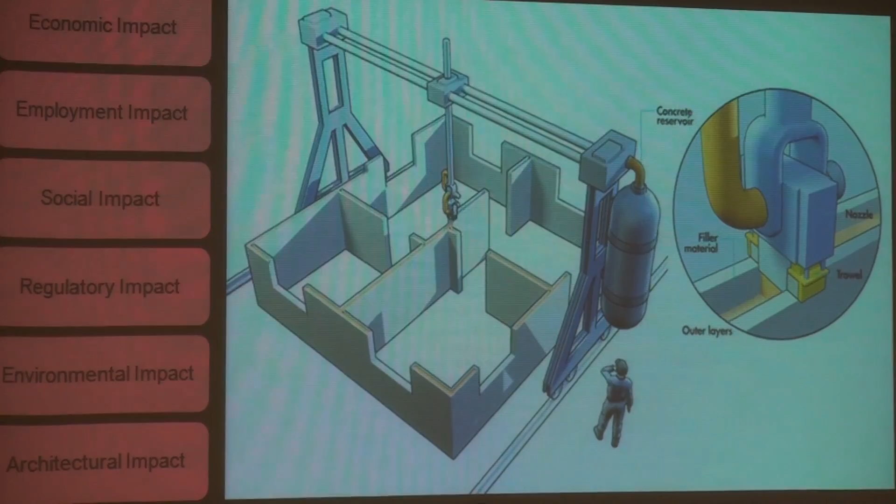The employment impact is a sensitive one. A lot of people ask me what's going to happen to construction workers. I always give them the example of the typists who were around when I was writing my thesis — we used to write on a stack of paper and give it to these poor people to type.

Almost all of them develop carpal tunnel syndrome, which is a terrible disease. Go to the internet and look at the way of treating this. The surgery is really amazing.

Devastating. They all developed psychological problems because of repetitive, non-creative tasks. They never paid attention to what they were typing and so on. And it was a very bad job. If they made a mistake, left a couple of lines out, anything after that had to be retyped. It's not like cut and paste that you see in the word processor today. So that kind of job had to go.

We couldn't have prevented the advent of word processing and computers in order to save those jobs. They didn't make sense. And I don't say this in front of construction people, but really a good portion of construction jobs should not be there. I respect the talents that these people have and the courage that they have. They go on top of these tall buildings and do dangerous things that are also difficult, and they do need some intelligence. But anything that machines can do is really inferior for humans.